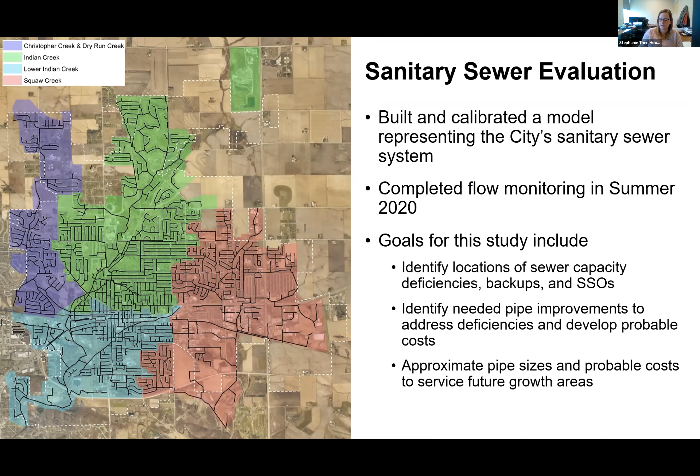Those were our goals for the study. To do that, we looked at 3 different events: dry weather flow, representing a sunny day with no rainfall; a 2-year wet weather flow, representing about 3.1 inches of rain over the city; and a 5-year wet weather event, representing about 3.8 inches of rain, and what the flow would look like in the system for each.

For each of those 3 events, we looked at a total of 13 development conditions. We won't go through all of these today, but a detailed description of each scenario is in Table 1 of the report, so you can follow along there if you have questions.

The 13 scenarios break down into 4 main categories. The first is current population within the existing service area, with 5 scenarios. Current population is estimated at about 41,000 people, and the existing service area is basically the existing city limits.

The next category was 2040 population within the existing service area. These 2 scenarios represent growth, with an estimated 48,000 people for 2040, again within basically existing city limits.

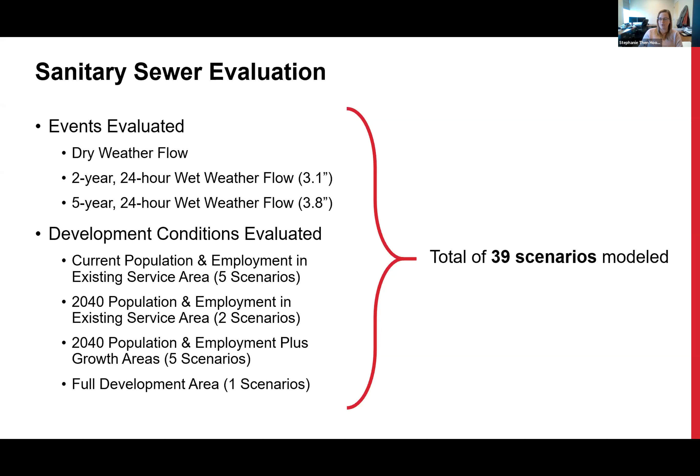Before I get into next steps, modeling results, and recommendations, does anybody have questions about the scenarios or the evaluation, the goals we had to address this? Anyone have any questions? Yes, Mr. Mayor, I do. Go ahead.

This is Grant Harper speaking, one of the council members. Just a quick question: relative to the 24-hour rainfall rates you used as an input to your model, would there be any difference to your modeling if those were flash rainfall rates, say within a 2-hour period or 3-hour period?

Yes, so the rainfall depths there, they would be different, but standard for design is to use a 24-hour rainfall depth. And so that's why we looked at the 24-hour depth there.

Okay, thank you. And for Mr. Barkalow's reference, I did page through the entire report. That's good.

All right, so as we're going through these results, a couple things. If you have the report handy, table 1 from the report again is a list of all the scenarios that we looked at. So you can keep an eye on that page, and then also figures 55 through 69 will also be handy. They show the different scenarios spatially. So if you want to see where we're talking about throughout the city, you can look at those figures.

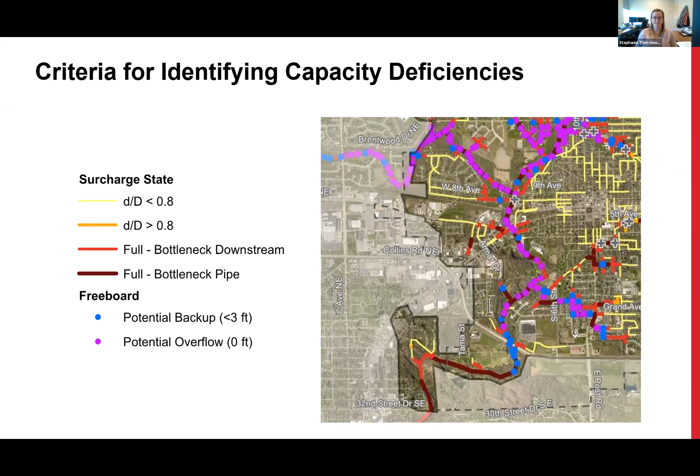Questions? All right. Okay.

So we defined our deficiencies. Now, how do we identify recommended improvements, defining that criteria? So like I just said, all sewer standard design is to design it to meet the 5-year, 24-hour wet weather event. So when we were looking at recommended improvements and proposing different projects, we were looking at the results for the 5-year event, and that's primarily what we're going to look at today. We're not going to go through any of the 2-year results, we're going to try and focus on the 5-year where those improvements are recommended.

And then when we had our list of improvements that we wanted, we prioritized them into 3 different tiers or categories. So the first tier, the highest priority, would be improvements needed to further development within the existing service area, so further development within existing city limits and address any existing condition issues. That's tier 1. Tier 2 is then to address or have improvements that would enable expansion into the 5 different growth areas that we're going to go over. And then lastly, tier 3 would be improvements needed to address full development conditions, or to double the existing population to 82,000.

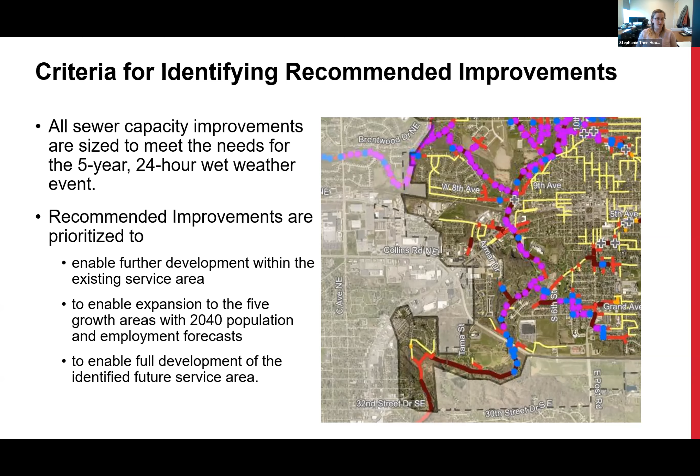So scenario 1 is existing conditions. This is the system as it is today. If you went out and looked anywhere in the city, this is what we would expect to see. So on a dry weather flow, 99% of the pipes are flowing less than 80% full, so we aren't seeing any issues. We have a few areas where pipes are flowing more full, but we don't have any backups. So we don't have any deficiencies, no issues to address in a dry weather or normal day for the sewer system.

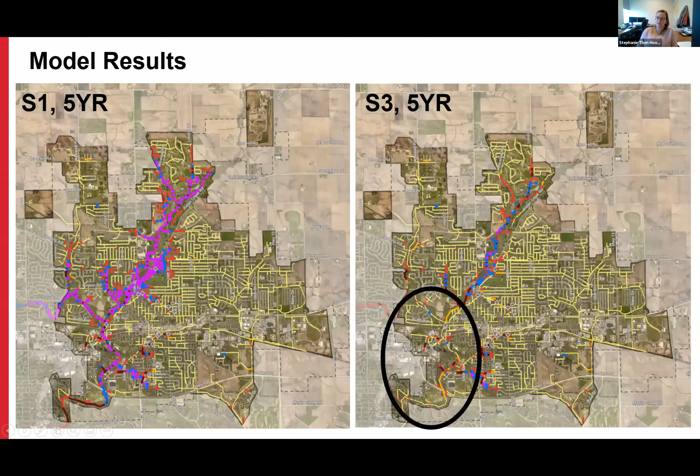And so that leads us into our first set. Oh, is there a question?

Yes, Steph, Grant Harper here again. Just quickly, does that then suggest that scenario 3, to address scenario 3 5-year conditions, or for that matter, scenario 1 5-year, is a high priority scenario to address?

Yep. Okay, so that kind of leads right into this next slide here of our highest priority project that we should be focusing on first. The 3 segments that we found were critical for reducing the deficiencies in scenario 1 are segment 7, 10, and 6. So segment 7 is underway, but 10 and 6 are really the next highest priority that should be focused on to improve the conditions for the regional trunk sewer.

But then we also found that there are 2 areas in the Indian Creek Basin within the city that, even if all of the regional trunk sewer improvements are completed, we still have potential backups. So we have 2 additional projects in the Indian Creek Basin that total about 1.7 million that we would want to prioritize for current conditions. If you've got your report open, projects 1 through 3 are shown in figure 6 of Appendix A, and projects 4 and 5 are shown on figure 55. What they are is adding capacity in the trunk line along this area, and then up along here, if you can see my mouse. These are the same projects that we had recommended in the 2019 Indian Creek study, so I believe these are already in the CIP and have been included there. So no change there — 1.7 million in the Indian Creek Basin and 11.5 million in the regional trunk sewer improvements.

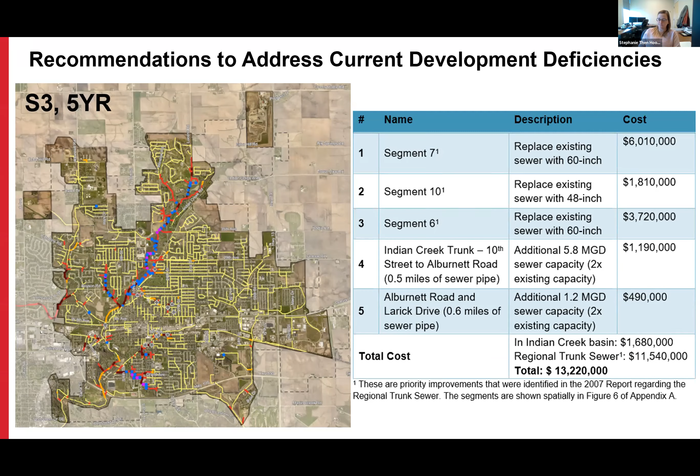All right, so moving ahead, these next set of scenarios are kind of our tier 2, addressing more future 2040 population deficiencies that we found. Here we're comparing scenario 3 to scenario 5. Again, scenario 3 has the regional trunk sewer completed, and the difference between scenario 3 and scenario 5 is that in scenario 5 we assumed a 30% reduction in I&I in the area — I&I being inflow and infiltration. What we found through the flow monitoring is that the lower Indian or older Marion area has high inflow and infiltration during rainfall events, so generally the flow in the pipes in that area was relatively small on a normal dry weather day.

But when rainfall occurred, the flow spiked a lot, causing some of the capacity issues there, that there wasn't enough flow capacity because of the rainfall that's infiltrating into the pipe.

We have a question. Did you say I&I? Yes, that's inflow and infiltration. Okay, thank you, that helps.

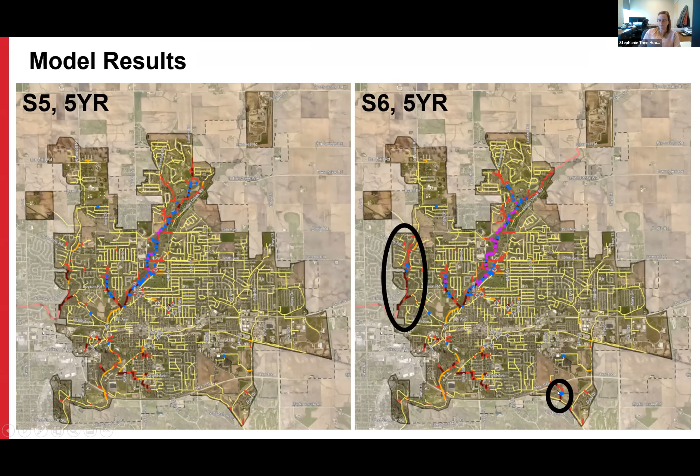So those 3 things, potential I&I improvements, and then the 2 areas in the Christopher Creek and Squaw Creek Basin, as well as regional trunk sewer.

So the first project is the Indian Creek trunk line, shown in figure 56 in the report, that's about $2.3 million pipe improvement.

And then the small improvement in the Squaw Creek Basin, shown in figure 57. And then here we have completing the rest of the regional trunk sewer improvements.

So highest priority are segments 7, 10, and 6. Once those are completed, we would want to complete the rest of the segments, which leads to about 20.7 million.

And then lastly, here's our I&I reduction improvements, which could be up to about 8.5 million in the old Marion area, or the lower Indian Creek Basin.

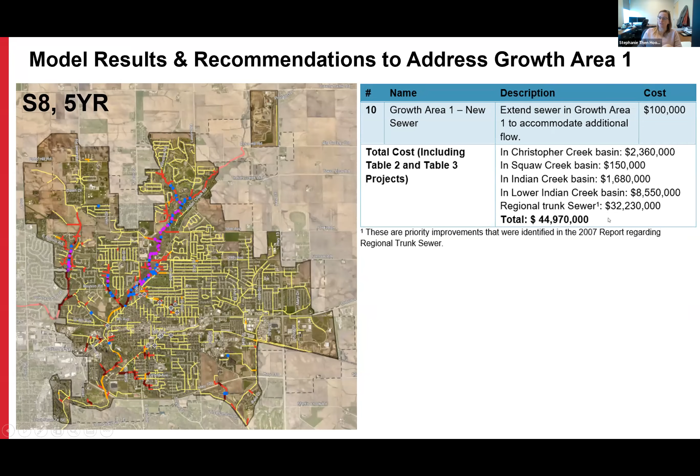This is where the city already has the existing moratorium due to sewer in this area. But we wanted to include it so we could get an idea of what it would take to address the deficiencies to be able to grow into this area.

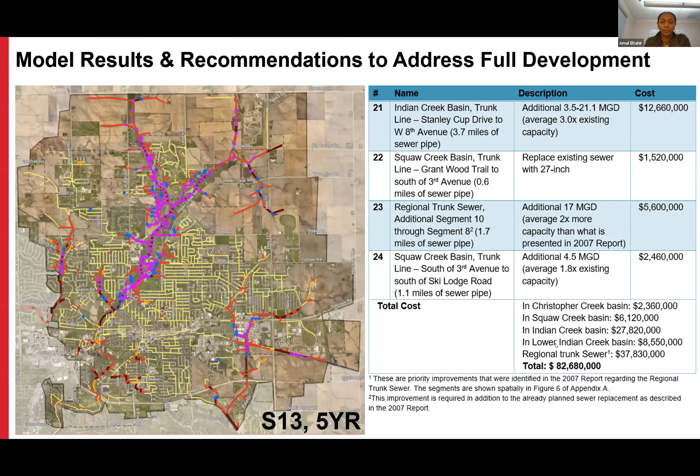Okay, so Amal just gave a very nice summary for us. Bringing everything together, we've got our list of improvements needed to address different conditions. Our highest priority is current development conditions, then growth or 2040 development conditions, then our five growth areas. And again, growth areas 1, 4, and 5 are going to be the easiest sewer-wise to grow into, and then our full development conditions.

So that kind of summarizes the improvements that we recommend in the report. A couple other recommendations from the report that we didn't talk about as much today are just continuing to support these CIP projects, as well as continuing to support and fund those I&I, inflow and infiltration reduction projects, like slip lining or manhole improvements.

And that kind of concludes our presentation for the 2020 study. So if there are additional comments or questions, we can talk more. Otherwise, I'm going to pass it over to my colleague Scott, and he's going to talk about our next steps in evaluating the sewer system, which would be to look at needs and impacts as individual developments come in.

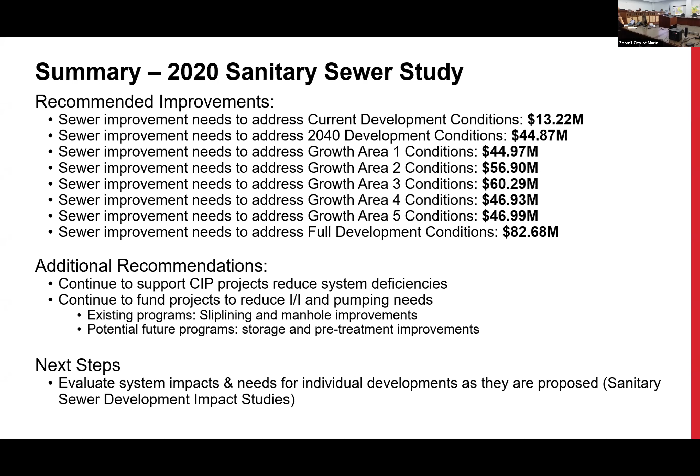Great, thanks. Good afternoon, everybody. So we've had a lot of talk about growth and potential improvements. One of the things we can use the hydraulic model for is to analyze the impact of certain developments or specific developments as they come into town and start to mature, and we can more accurately define what they're going to be.

Typically these development impact studies include determining the incremental impact of proposed developments, defining the loading assumptions and the design criteria we're using to analyze these developments. And then we have to clearly define the baseline, what we're analyzing the system against - so analyzing the system without the development, which is our baseline case, and then with the proposed development.

Once we do the analysis, we develop an impact study technical memorandum. Typically, the data we'll get from the development is either a utility plan, which has the preliminary utility infrastructure laid out with maybe some lot lines and land use unit counts - an example we actually did here locally on the left. And the example on the right is one we got from you, where we'll get a site plan which has proposed unit counts and some land use, and we can develop our loads based on this data.

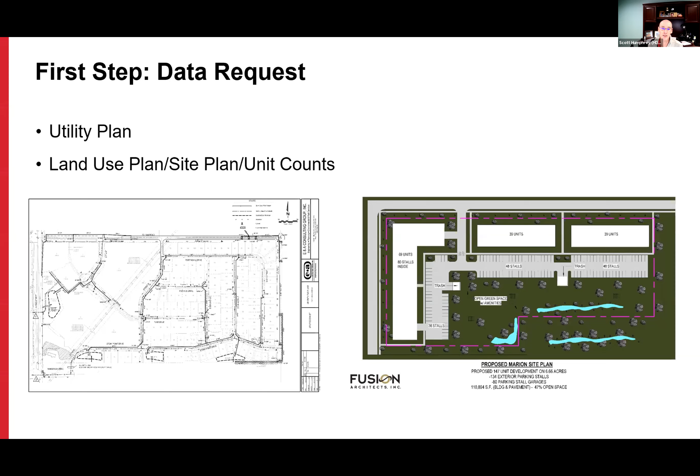So then what we do is take that and develop our loads, and we'll go run the hydraulic model, and we'll get results for recommended upsizing.

This is where it's very important to establish our baseline, and we'll take a look at what the impact of the development is. Steph laid out a lot of improvements, so we can analyze the timing of these improvements, if they're required for a particular developer. And if they are required, we can clearly identify here's the pipeline diameter we established in our baseline, and here's the incremental impact or the pipeline diameter that needs to be upsized because of your development. We'll do a list of recommended improvements.

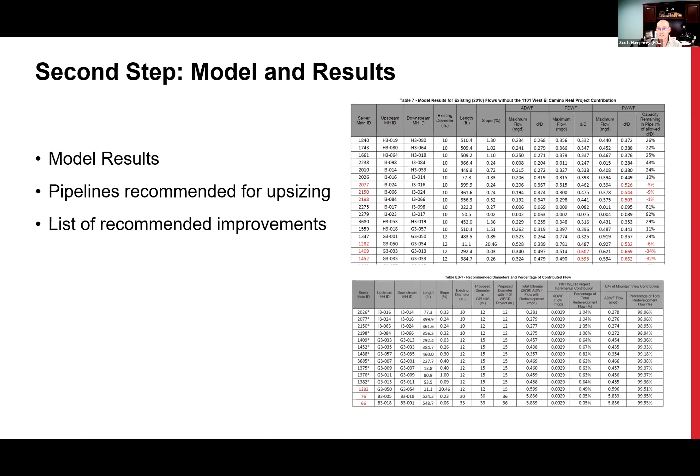And then we've had a lot of discussion on costs, and I heard some things about cost sharing as well. So in that case, we can clearly identify what's the proportionate cost for the developer and what's the proportional cost for the city. And then lastly, what do these things typically cost?

We've done a lot of these in the area, and they can range anywhere from simple studies for analysis and technical memorandum - the typical range is $5,000 to $10,000 basically. So $5,000 will be on the lower end, a simple study, small number of units, uniform land use, and key to this is the service connection - is it a straightforward service connection, 1 point, maybe 2 points?

And then we can get into the higher end, which are more complex studies, which have larger units, mixed land use - it gets a little bit more complicated. And if we're looking at alternatives for service, maybe multiple connection points, maybe it makes more sense to go one direction or the other to avoid an improvement. This would include all the development of the loads, the hydraulic analysis, the design criteria, and then a technical memorandum or report that clearly defines what those impacts are.

And that's basically it for development impact studies. Any questions?

So a question for either Scott or for Mike - are these development impact studies currently being done, or is this a new proposal? So this is a new proposal.

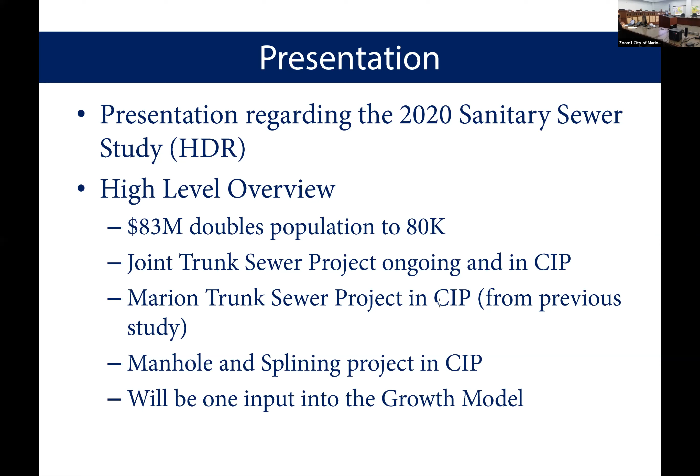Okay, next on the agenda is item number 2, which is a presentation regarding the 2022 tentative budget.

Welcome, good afternoon, Your Honor and City Council. This presentation is going to be short, I promise to keep to that this time, mostly because of the work done previously. During our last meeting with City Council about two weeks ago, it was a very engaged meeting, and we appreciate your review of the budget. This is an overview of those changes since last time and the high level changes you'd expect to see in the FY22 budget. There's not a request for an additional $83 million in FY22 — that will wait for a later date over multiple years. Next slide, Tara.

The property tax impact, just to remind City Council what was discussed last time: moving forward to the tentative budget, which would become the adopted budget unless council has other recommendations, we'd be looking at a tax reduction this next year of about 1.5 cents. This would be the third year of either a property tax reduction or a flat levy — flat in FY20, a reduction in 21, and another reduction in 22. For the average residential home, per $100,000 of taxable valuation, this plays out as an increase of $18 due to the rollback, so as those values shift annually on the residential home, that does change. It is a property tax rate decrease, but it would increase slightly.

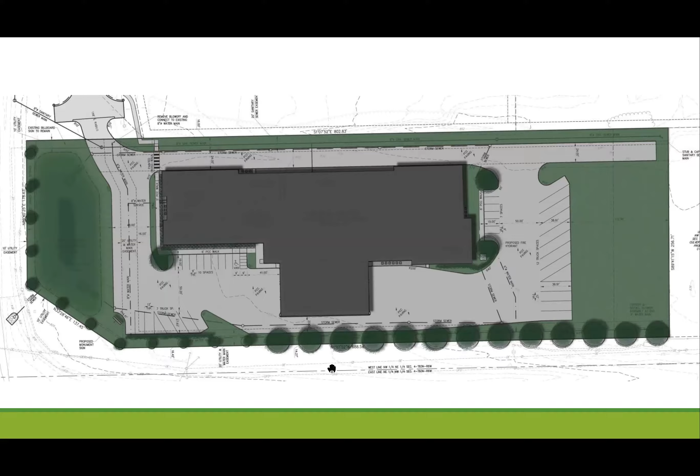I just wanted to show you so you'd know. It gives you the footprint, or an overview. And this is an actual rendering.

This represents the planning, maybe a little bit of an older version. We've gone through several versions, but I think we've got it into the city right now for approval of the site plan. One thing I can talk very highly of is I think we do a very good job on how we make this look, and later in the presentation I'll show you what we did in other cities so you can see that we take everything into consideration.

When we came to the planning department, we asked, do you want to see some other surfaces on the building to dress it up and make it look nice? I'm one of these guys that wants everybody behind it and just as excited about my project as I am. So I pride myself in trying to do a nice design, aesthetically pleasing, and also landscaping.

I've got some of the numbers. As we went through this process with the civil engineer and the landscape architect, there's 28 trees required for this project. We're putting in 41. There's 90 shrubs required. We're putting in 410 shrubs. I've done this in every city, almost triple the landscaping requirements, because I understand curb appeal sells.

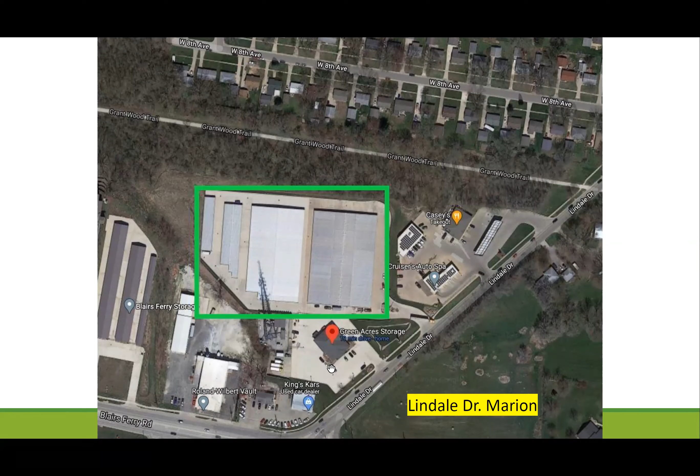The next slide. So changing the zoning, I keep getting this, and at the planning commission, I think all of them were actually for the project, but on the zoning, they changed the comprehensive plan. I believe they approved that to open the door, because most of them said that they would not let the rezoning go through unless they accommodated us. I believe a lot of them were for this project and couldn't believe there was even a discussion about it. I think the planning department can probably share some of the takes on it, or there's a recording you could listen to, but it went on for about 2 hours, I believe.

But it's one of those things, we fit in any area. I would fit in an industrial area easily, but that's not our ideal situation. I would not put a storage place in an industrial park where no one is there on the weekend. I don't believe it's a safe environment for customers to go out by themselves, because you have to think, okay, your wife or your daughter is going to go pick up a few items from your storage unit, and it's in an industrial park where nobody is at on the weekend. I would not feel secure or safe in that environment. But if I'm on a main road with lots of cars going by, I believe I feel very safe. And that's why we chose this location, because high visibility is where we feel we have the best security, and that's what our customers are after.

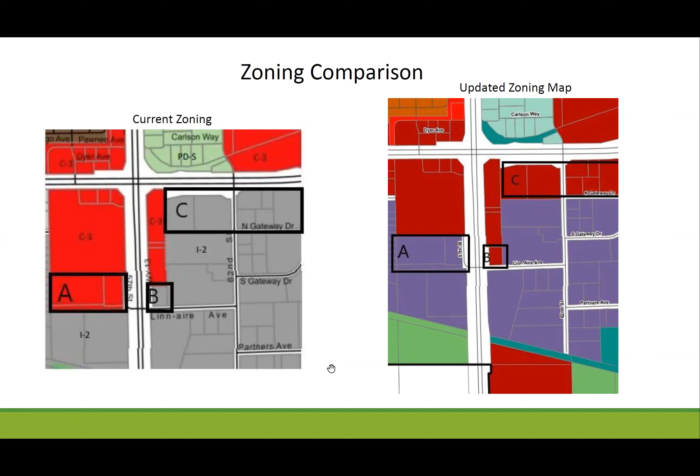The future land map general guidelines. If you read through this, the land use plan is intended to be a general guide to growth and development within Marion, and it's not a development plan of rigid and finite recommendations. This plan allows for individual negotiations and considerations, creative approaches to land development. So that opens the door to a new creative approach. And if you think this is a new type of industry, that probably fits in that definition.

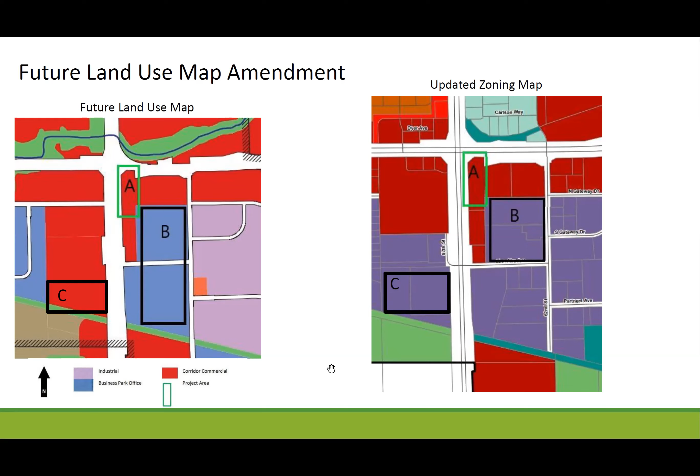And I can tell you right now, there's two projects that are finished, and I gave you the addresses for all of these on the next slide that show what the address is, and you can look it up yourself. Between now and the time you need to vote on it, I think it would be interesting to see - but I did some quick adding here, so there's 15 projects in the Des Moines area.

All of these cities welcome and embrace self-storage. It's just a necessity in every city. It's something that your residents want, and it's a service that you should provide them.

In Des Moines, I calculated just these 15 projects will bring in about $1.6 million in property taxes, and every one of these facilities pays 1% sales tax. I don't know if the council knows that we're the only industry for property where this applies. If you rent an apartment, you don't pay sales tax. If you rent a business property, you don't pay sales tax. If you rent a house, you don't pay sales tax. But on self-storage, it's actually taxed. I can tell you our current facility in Marion, we pay $136,000 in property taxes, and we give the city of Marion $100,000 in 1% sales tax every year.

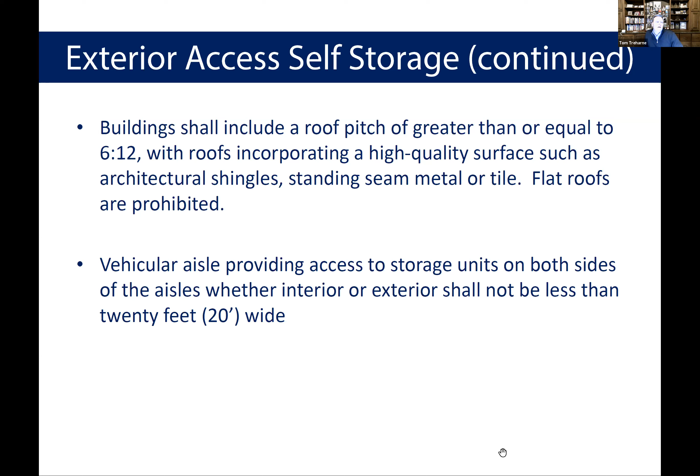As something new—but I would point out, as we move into interior, let me back up a little bit. This is just a point: this is a plan currently sitting on our desks in the planning department and building department right now. This is the corner of 3rd Avenue and 44th Street.

I think if you go across the street a little to the west, you'll see one similar to this. We've got numerous ones up and down Highway 13 that are similar, 1 acre, or probably less than an acre inside. So obviously what we would like to see is something of a little better, higher design standard if this was going to be opened up into a commercial district.

This land use and site design, I think, is fine in an industrial district. It's just, as you move into a commercial district, I don't think this is what we really want to see along the new 6th Avenue, Tower Terrace Road, or any of our major arterials of the north part or the south part of the community.

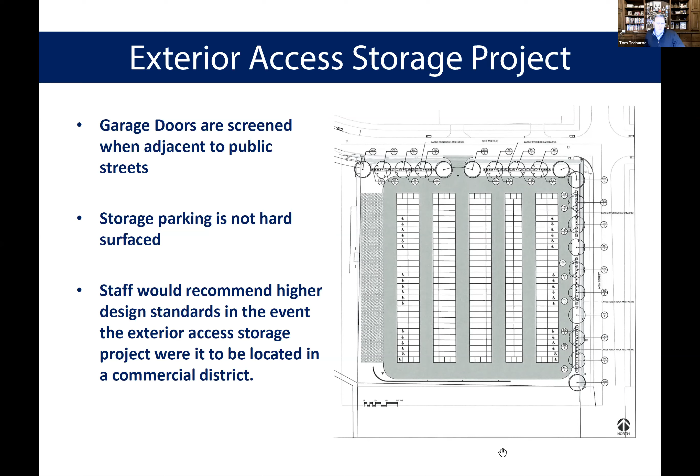Moving into the new use, interior access self-storage, you can see that this type of building is intended to allow for facilities where all units are accessed by interior hallways. The structures shall emulate the exterior architecture and character of buildings in the specific district in which the facility is located, and the following standards shall apply.

So what we've done is we wanted to provide for a definition of the use, talk a little bit about the building so that when we're reviewing it, we have something almost like a purpose statement. And then we're going to walk down the road of some standards.

All storage units shall gain access from the interior of the building. No door may face the street or be visible from off the property. If the facility abuts residential zone property, the facility loading bay docks and doors shall not be visible from the residential district.

In other words, there's a lot of BR district that does back up to residential zoning. So we want to ensure that if you're a resident in that district, you're not walking out your back door and finding and watching people unload their vehicle in a commercial district right across the fence.

Ground floor and upper floor facades shall be designed to be compatible with adjacent development and architectural standards. So this is just, and then we're wanting to make sure that there's design elements within that. So it's not just a massive wall.

I know in the illustrations that we've seen, Mr. Green's property proposed here in Marion, I think it lends well. I will say that some of those that he's illustrated look more manufacturing than they do commercial, and I would see them more apt in a manufacturing district or an industrial district. Now, that is my perception of what they look like, and he has his perception. I think that's why we have to have some general design standards and discussions as we move these projects forward.

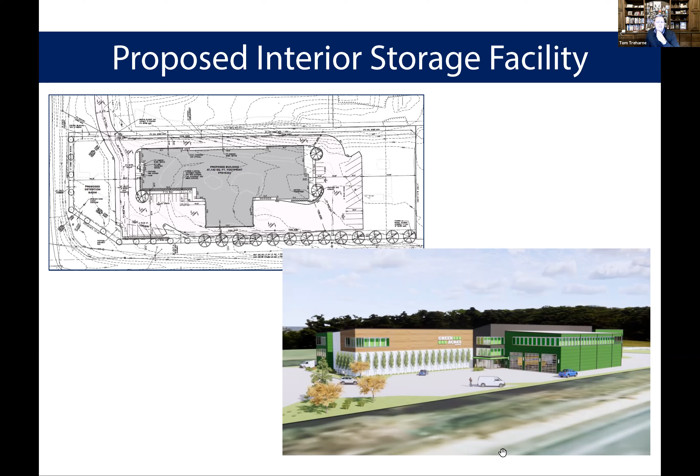And then we get into just prohibited uses. So this is speaking to, we don't want to see residences, workshops, or such. We have contractor condos that would be a different use if that's the case. And then we certainly don't want any repair, manufacturing, obviously. This covers both self-storage in itself, exterior or interior.

So we're not suggesting that any - I know Mr. Green wouldn't do this. He keeps a pretty clean operation, well aware of it.

So I also just want to point out that I didn't walk through every code section that we have relative to these. There's already in existence bulk regulation, so the size of the lot, how big they can be. There's already a landscaping standard in place for most, but you've seen that applied to that Culver project or that storage facility that was proposed earlier.

We've got fencing and buffer yards. We do want to make sure that we're eliminating some of the more obnoxious fencing provisions if we do get into a regional business or business regional business districts. We have lighting standards, signage standards, and then site standards, including access, stormwater, fire access, and code.

So I think the big ones you guys wanted to hear about this evening are primarily related to the use in the district and the design of it.